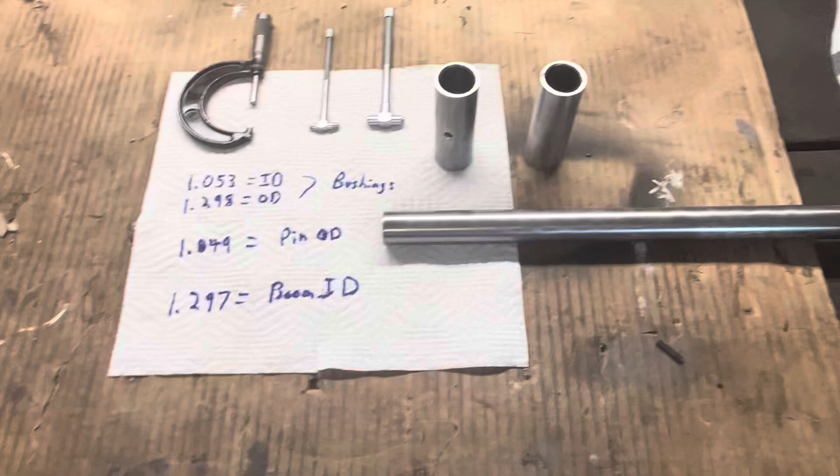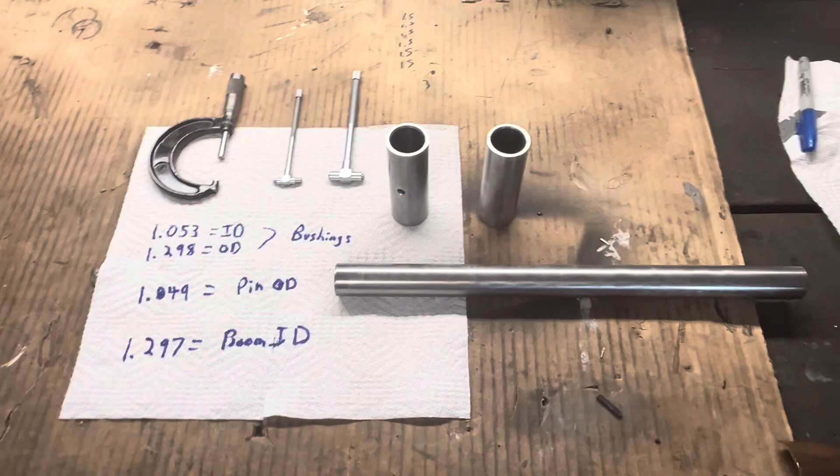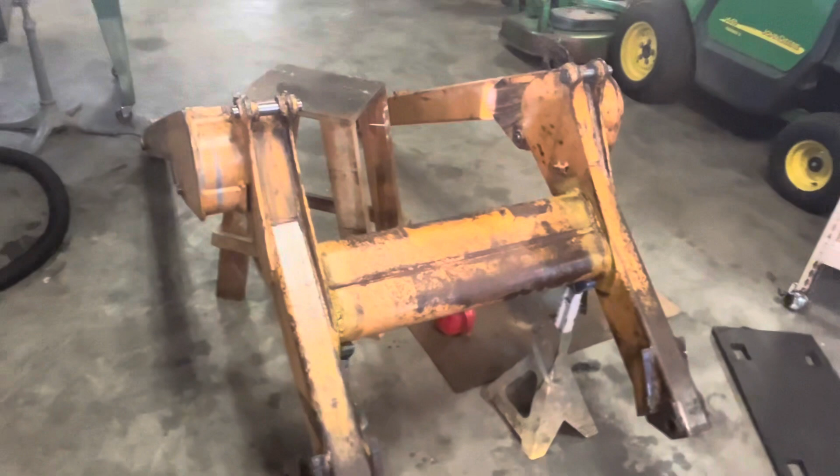If you're new to the channel, I'm working on the boom and quick attach of a 1989-1990 case 1840 back there in the corner.

So a couple months ago, just a quick recap, I drug this thing home, engine runs, powertrain seems to be good. Pins and bushings are more worn than I was aware, especially these lower boom bushings.

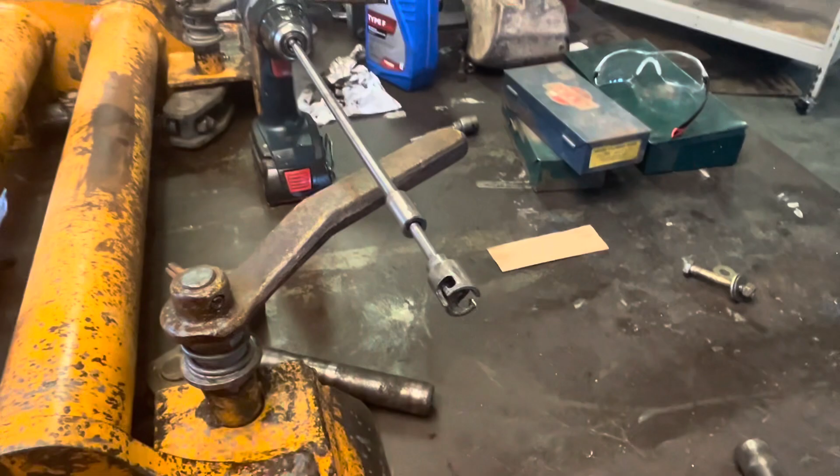In a previous video I showed how I line bored with a homemade line bore setup. But I just want to give a quick update. I've got a lot of time honing with some of my manual hones. Here's the little driver for it. These are Ammco wheel cylinder hones from, I think, the 50s or 60s, sometime in there.

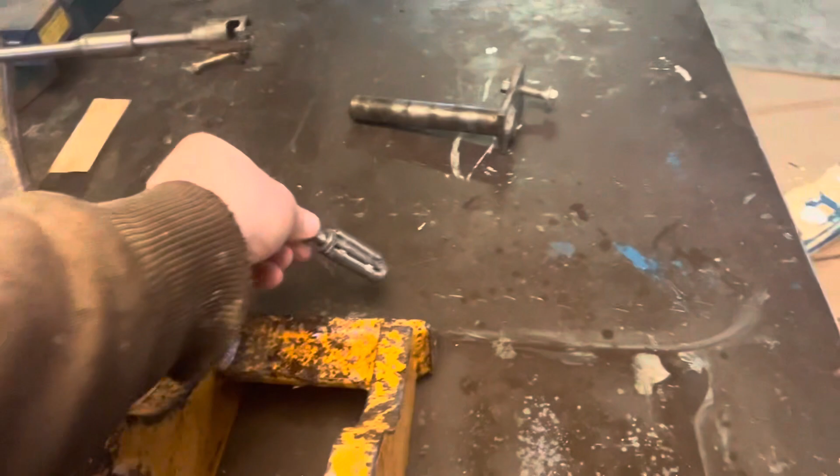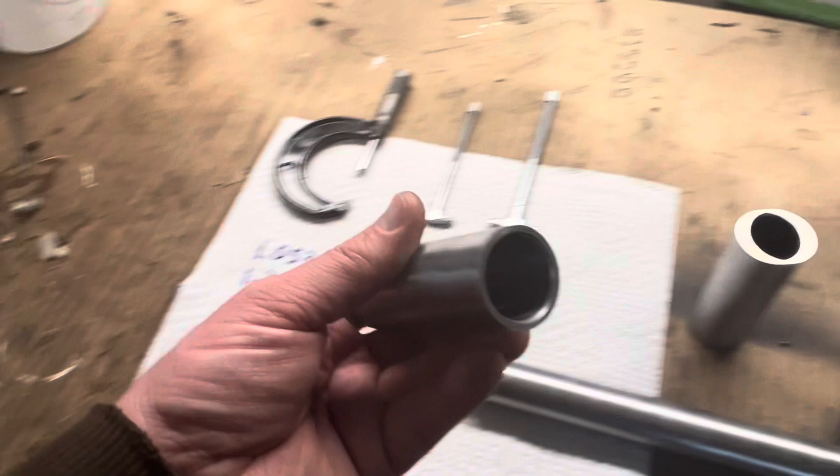I've literally spent, I probably got about 2 hours at least in each one of these, probably more like 3 hours, but these are the bushings that are gonna go in the bottom of the boom arm.

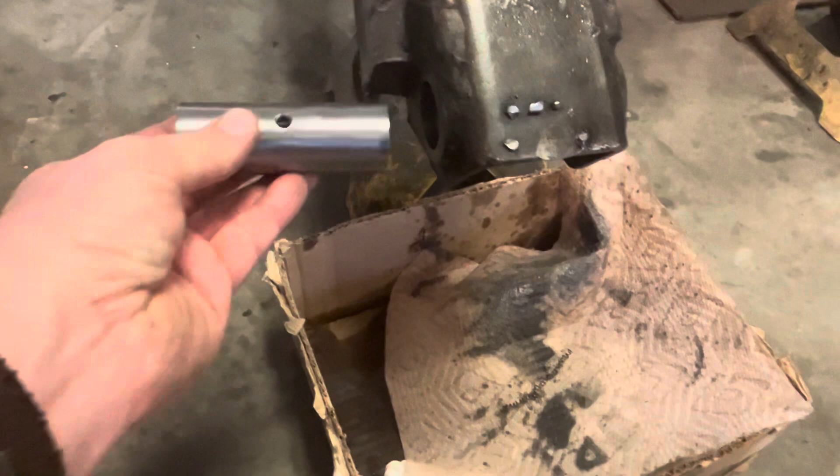That's the hole for the grease. These will get pressed in there. So I'm just going to show you some dimensions, final dimensions.

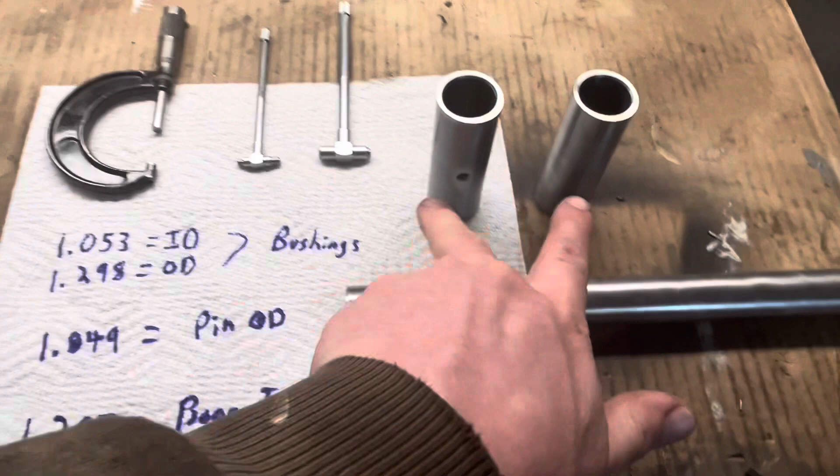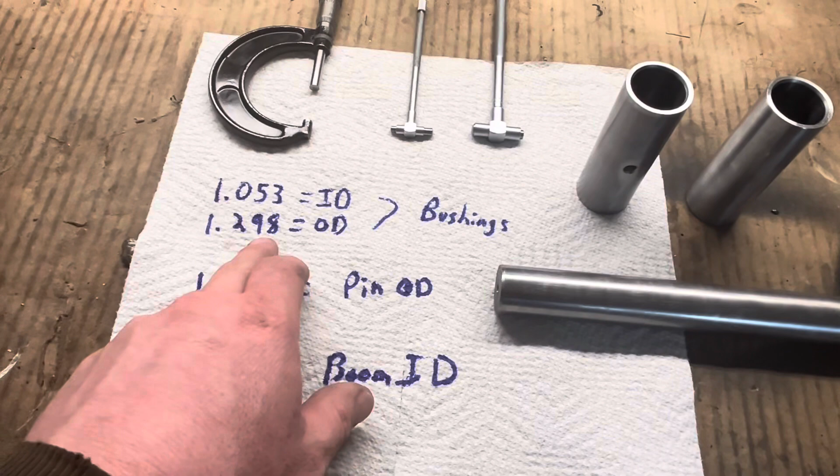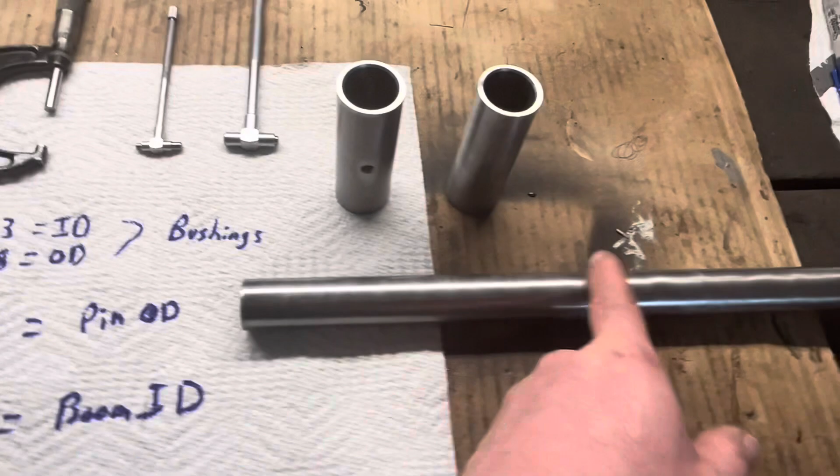The inside of these bushings, I honed them to 1 inch 53 thousandths. And the outside diameter is 1 inch 298 thousandths. This gives me a pin. So my pin here, this gets cut in half. It's a lower pivot right here.

These I honed to 1 inch 53 thousandths. The pin is 1 inch 49 thousandths. This is made out of 4140. I'm gonna heat treat and temper this.

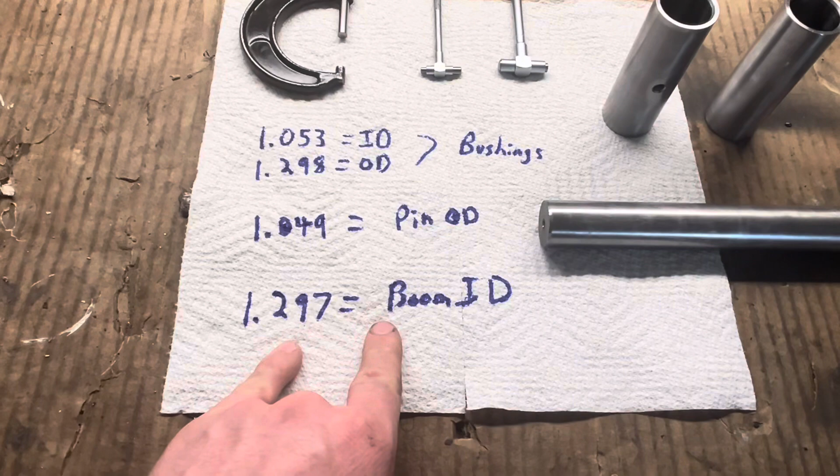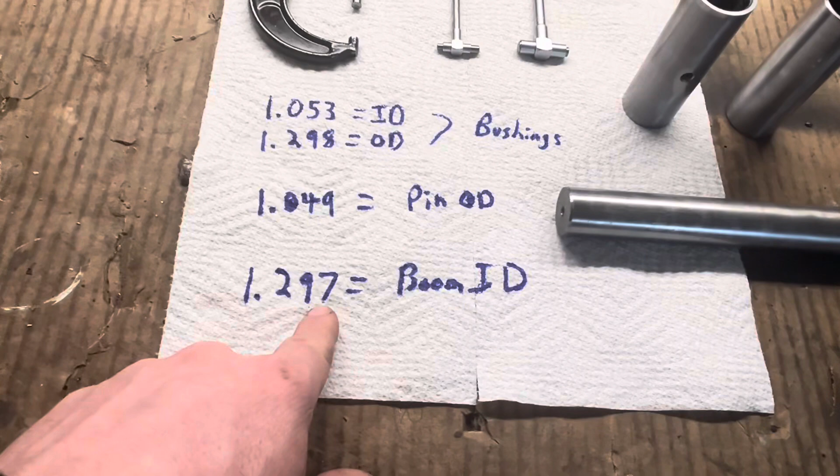The boom ID is 1 inch 297 thousandths. I honed and honed and honed to bring it up from like 1 inch 293. Took me a long time to get 4 thousandths out with that hone.

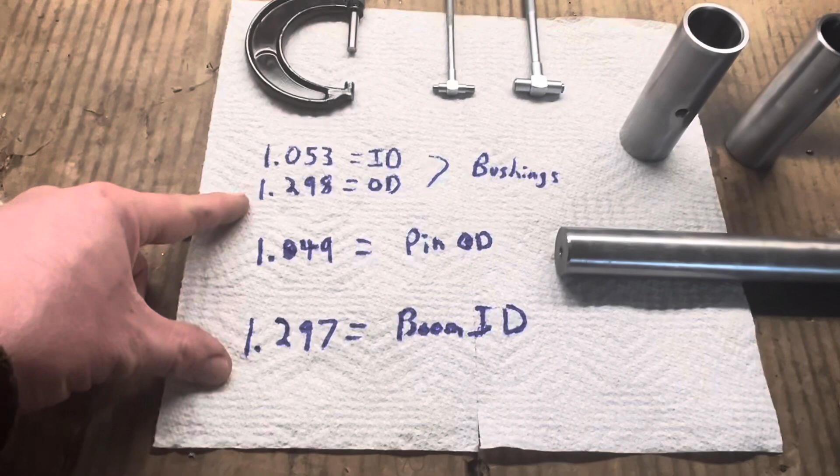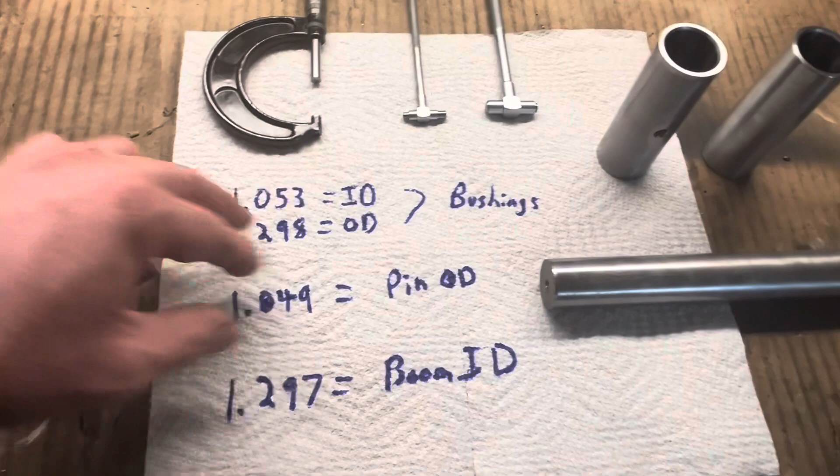That gives me an interference fit between the outside diameter of the bushings and the boom of 1 thousandth, plus or minus a few tenths. I got them pretty close. I have 4 thousandths clearance between the pin and these bushings.

They're definitely within a half thousandth, probably less than that, because I honed everything to size. I cut them in the lathe, everything within about 2 thousandths, and then I took the final 2 thousandths with those hones, which I can't tell you how much time I've spent honing these parts, but that's what it takes to get the tolerances. Probably better than factory. I don't know what the factory tolerances are.

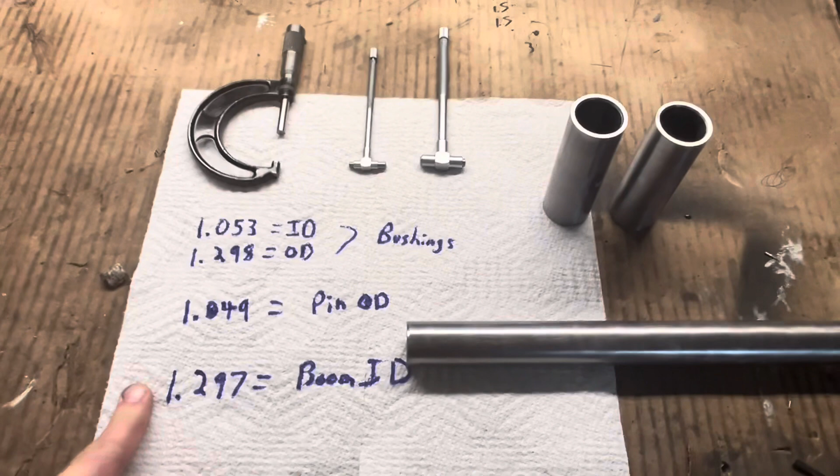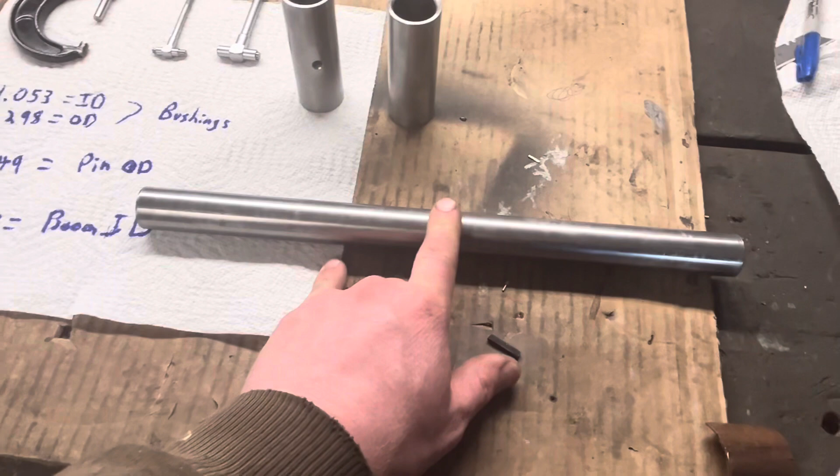So this is 52100, also known as ball bearing steel. I will heat treat and temper that in my forge with a temperature probe, and they get tempered at, I've been tempering them at 400 degrees. The 4140, I'm going to temper it at a higher temperature to make it softer.

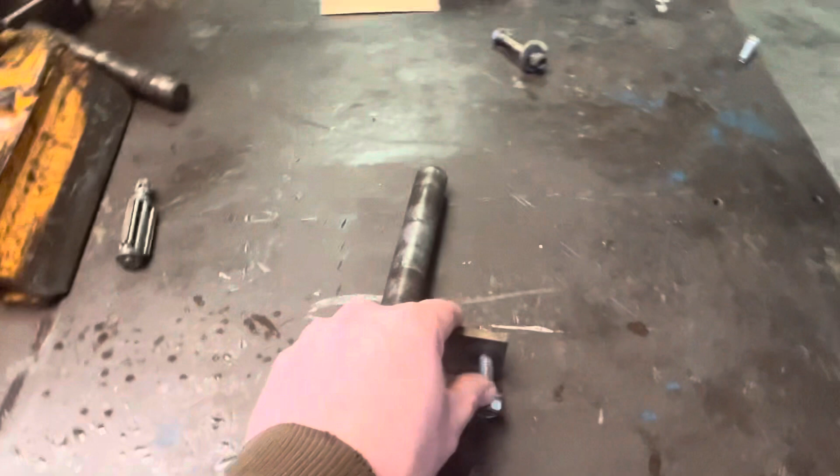But again, I'm concerned with these pins, they need welded onto something. I don't know how I'm going to do that, because I don't think you can weld high carbon steel very readily. So I'm not even sure how they did this, or if this is even high carbon steel. I would think it would be, but I don't know.

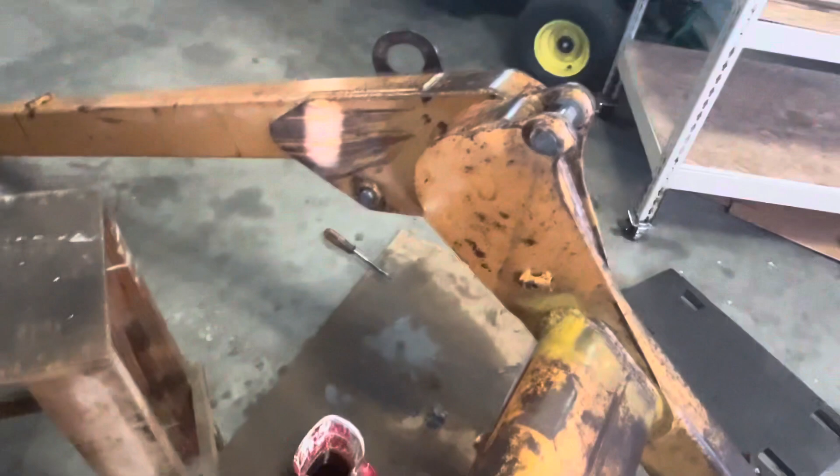So I'm coming down to the home stretch here. I have the boom bottom's taken care of. The pins, custom made and honed up here. The pins here, custom made and honed, and this is all oversized. I got some of this in another video. I got the bottoms here honed, and now I just started on, this is the cylinder tilt.

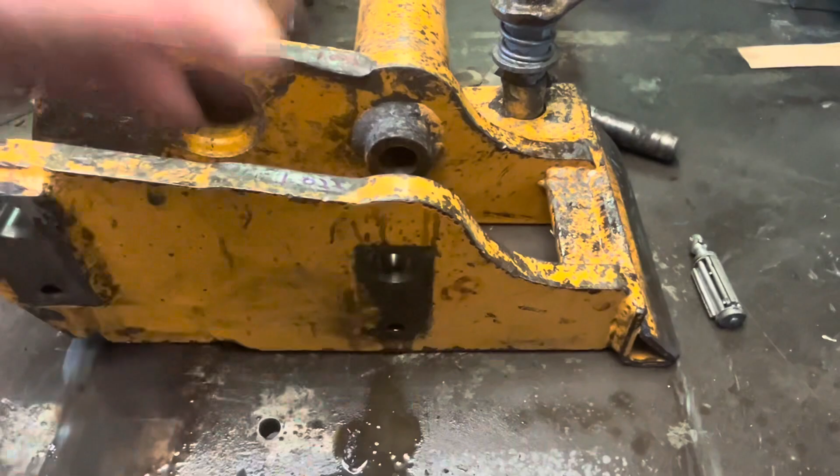The end of the cylinder rod's going here, tilts the quick attach. And I run into another problem. I got the measurements. I honed this a little bit just to get the debris out, just to see if it was egg-shaped. It really isn't too egg-shaped.

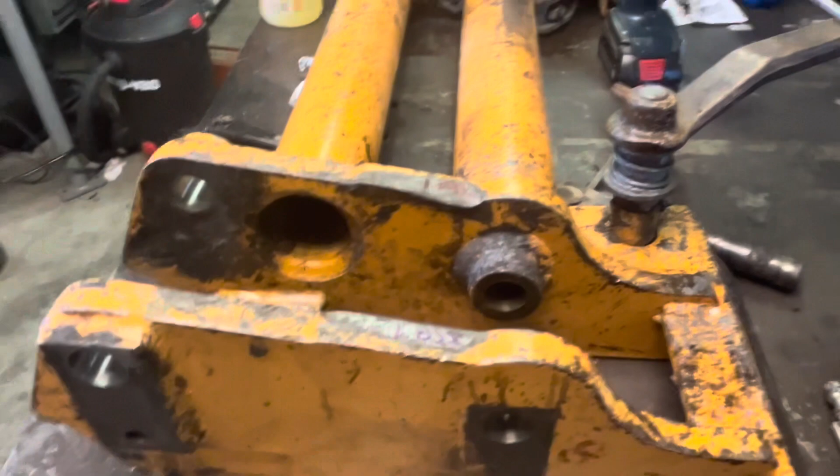Inch and 22 thousandths. The inside one measures inch and 32 thousandths. 10 thousandths difference. I could probably hone that out in a few hours, but that's not the problem.

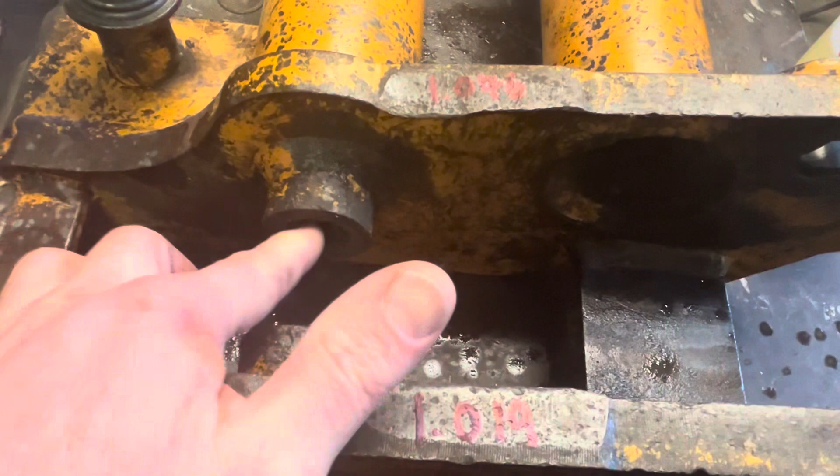The biggest problem is over here. This outside one's 1 inch 19 thousandths, and this inside one's 1 inch 46 thousandths. That's a 27 thousandths difference. You can't hone 27, well, I guess you could, but 27 thousandths is going to take hours and hours and hours.

I don't even know if you could do it without ruining the hone. A hone is meant to hone the tolerance, not to bore out. So I may have to come in here and line bore this now. I really don't know what I'm going to do yet, but I just want to give you guys an update of where I am on this project.

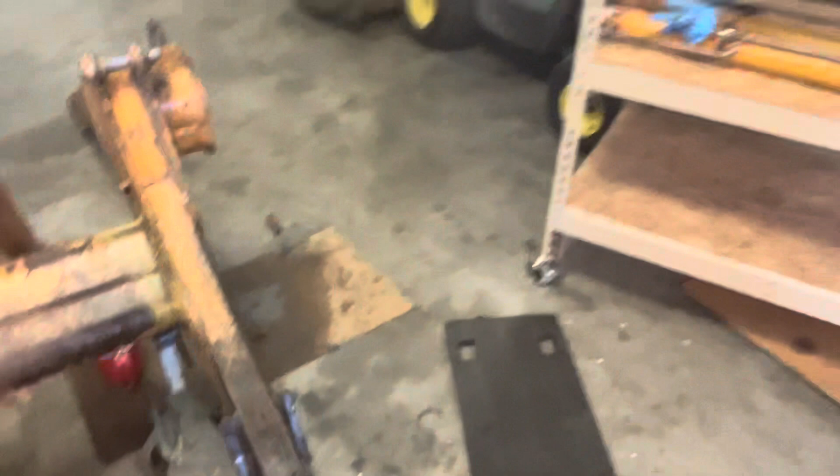After I get that figured out, the final pin and bushing on this machine are the ends of the loader boom opposite of the bucket that attaches to the top of the machine frame there.

I don't know, the state of those look to be better than the rest of this because I think they were the easiest ones to grease. Someone even put these grease extensions on.

Sorry for that sun. I don't know. I need to figure out how I'm going to line bore this.

I'd like to bring it 50 over, just like this one. These were close enough. I was able to hone those out to 50 over. But I can't hone this. I guess I could make this side 1 inch 33 and this side 1 inch 46, but having them different side to side really kind of bothers me.

So I think I'm gonna rig up my homemade line bore setup again, bore this to like 1 inch 48 thousandths, and then take the last two with the hone. That would be ideal, and then this whole thing would be 50 over.

Anyway guys, that's where I'm at with the pins and bushings problem. I've spent about the last month on this. I'll give you another update in the future. Take care.